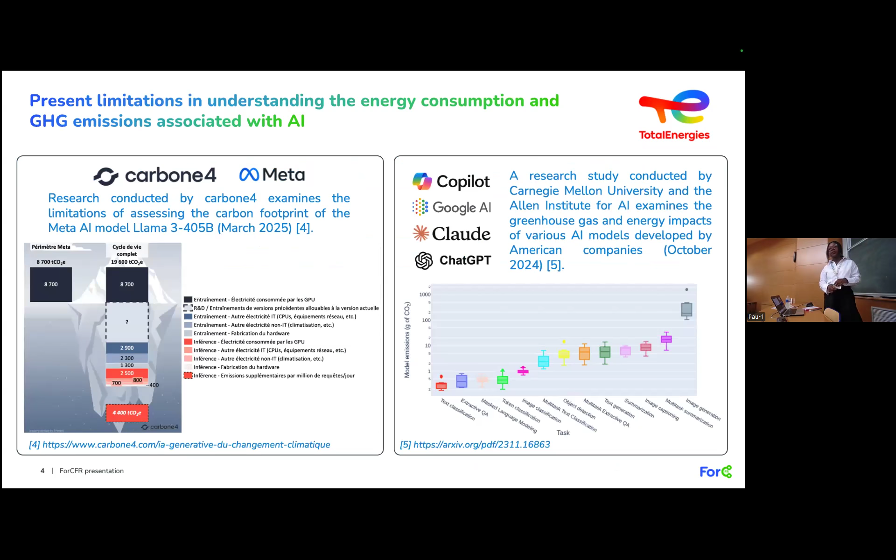There had been other studies trying to understand the energy consumption and CO2 emissions of using AI. There was a study done by carbone4 and Meta, trying to assess the limitations of estimating CO2 emissions. They concluded that the tip of the iceberg, shown in the image on the left side, is responsible for the consumption of electricity by the GPU. The GPU is the unit responsible for processing graphics for ChatGPT, for example.

What's below the tip of the iceberg is what we cannot see. All the emissions we are able to estimate are only the tip of the iceberg. All the other emissions, more than half of the iceberg, we are not able to accurately estimate. These emissions are mostly from training of data—we know that with AI we need to train data so it can recognize images, etc.—and we also have emissions responsible for manufacturing. So all of these emissions, we are not actually able to estimate properly.

Let's think about when we ask ChatGPT to summarize a text, for example. The emissions that they show us are probably only less than half of what we're actually needing. So let's start from here.

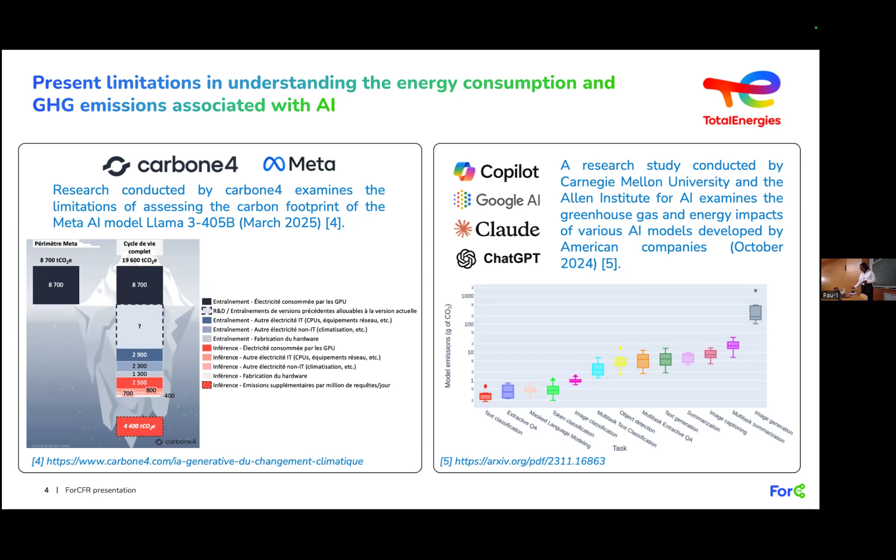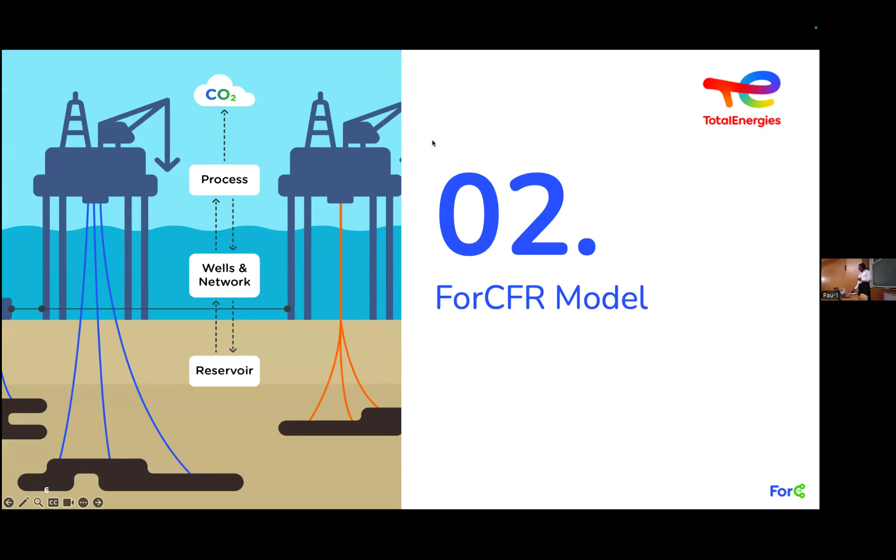As for the ForCFR model, before we actually construct it, we need to analyze a production field. We need power to be able to produce, but to produce this power, we need to burn fuel gas, and by burning fuel gas we'll have CO2 emissions. What we've seen based on experience is that most of the power requirement in a field comes from reservoir management and export.

Reservoir management involves water injection, so we use a lot of water injection pumps. For gas compression, we use a lot of compressors to compress the gas, and also for export. So before we think about tackling CO2 emissions, we need to look at where we have the most emissions and start from there. Then we look at all the other parts, but this is the main part, so we usually attack from here. This is what we can do with ForCFR.

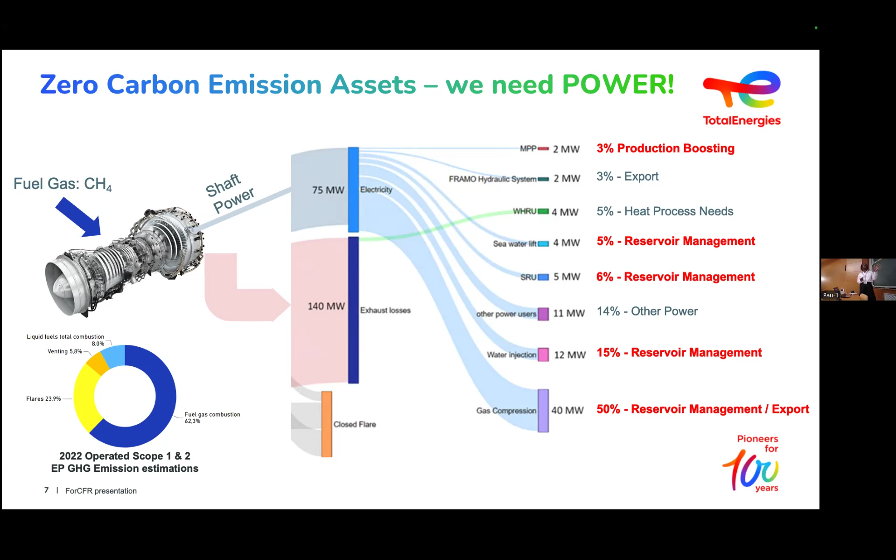ForCFR is a solution for the industry because before, some engineers, reservoir engineers, well performers, were evaluating production profiles and optimizing separately. They wouldn't communicate, they would do whatever they had to do, but separately. Then they would take these production profiles and input them into a CO2 file, which at the time was an Excel file, and try to calculate the CO2 emissions associated with their production profiles.

Then they had to test different scenarios. Let's say they were trying to close a compressor to reduce emissions, but this would take half a day. That's a lot of time. And if you have 20 scenarios, you'd take two weeks to analyze them. In oil and gas, time is money.

Then ForCFR came as a solution because now you have integrated CO2 emissions within ForCFR. You don't need to look only at production profiles and then go check CO2 emissions separately, you have both with ForCFR. You use your production profiles as input, and ForCFR gives you your CO2 emissions within seconds. Then you can choose to optimize your production with ForCFR, and you get your CO2 emissions straight away in the results.

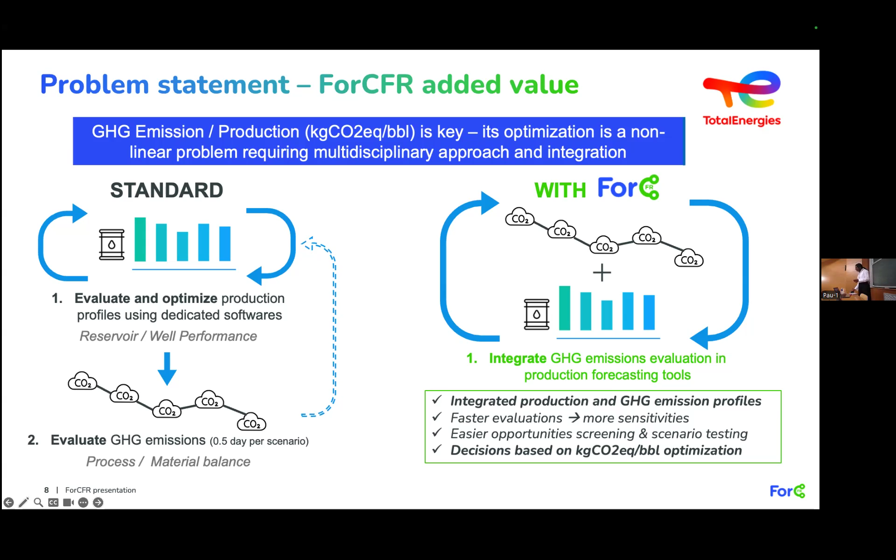This helps all engineers make decisions based on intensity optimization. Now you don't have to look only at CO2 or only at production, but at both. So this is actually a gain.

Okay, where are you from? Nigeria. Brazil, okay, very good. And online, if there's anyone from one of these countries, please, can you show an emoji? Thank you.

So now I show you the ForCFR interface. This is what it actually looks like. As you can see, we have - I'll just activate the pointer for the people online. So as you can see here, we have the schematics, and here I would say a mimic of the production inlet of a production facility.

So we have as inputs the production profiles and the equipment performance curves. The equipment performance curves will be used within this equipment here, so we are able to calculate the power demand. Once we have the equations integrated into the model, we run the model, and the model runs behind it with a Python script. Once the model runs, we have as outputs the GHG emissions profiles, and this is actually our final results.

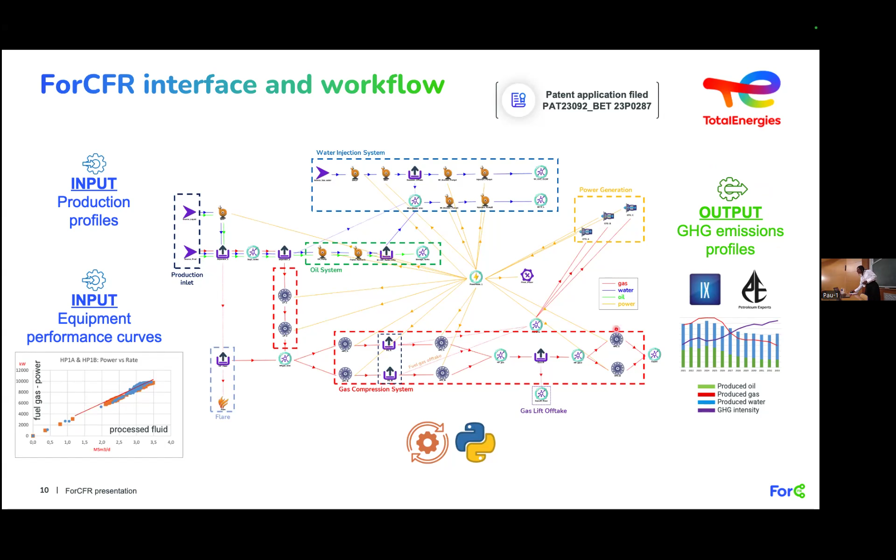Then we move to how we construct a ForCFR model. The first step to constructing a ForCFR model is the data collection. This is a very important step because this will ensure the quality of your model - the quality of the data you have will ensure the quality of your model.

So here we usually need the description of the process. It can be a PFD, a process flow diagram. We need the equipment performance curves. For greenfield, we don't have these performance curves - we will have rather the theoretical curves. But for a brownfield, we will have the historical performance curves. And then we will need your production forecasting tool, which is usually a Gap model or an Intersect model.

So we can couple your production and have the integrated emissions profile. A file that we usually use that is very important is the process quick look assessment, because it provides us the assumptions of the equipment, the availability of some equipment, and the way we need to operate some of the equipment. So all this information is actually very important.

Now to the ForCFR modeling, as I mentioned, we need surface process. So we try to mimic the process, but simplifying even more. We try to model all the consumers that are important for the CO2 emissions, the ones that consume the most power in the field. Then we try to balance the model by matching the material, power, and heat balances. This will also ensure the continuity of your model.

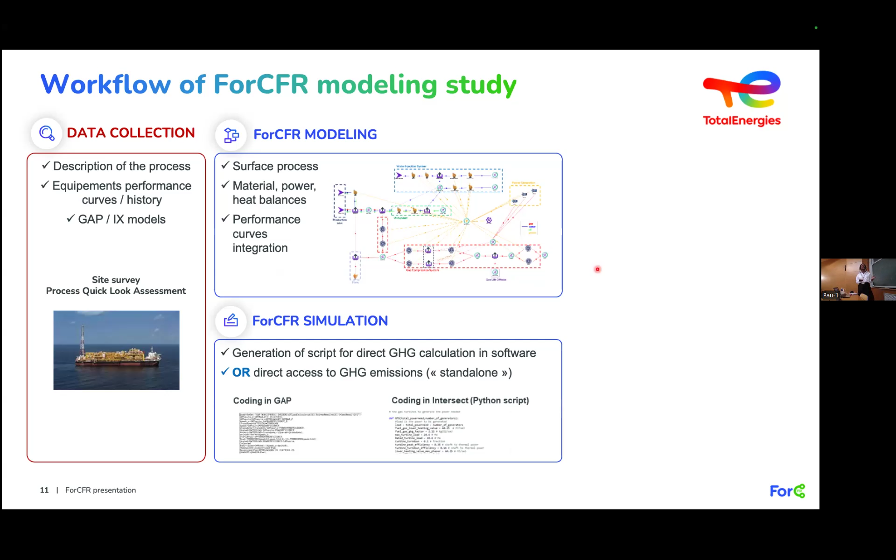So Intersect or Gap. In this case, you will have your script generated and automatically linked to your reservoir model. And all you have to do from this point onwards is what you do as a reservoir engineer - you just run the simulation and that's it. You have your production profiles and your CO2 emission profile.

So if you look at this plot right here, you see that you have your production profiles with your GHG intensity. So as easy as it is, you have your CO2 emissions with your production profiles. You will be able to see long-term, short-term, whether you have any opportunity to reduce the CO2 emissions.

ForCFR can be used for a lot of cases. I'll start with the long-term plan, which is the case we use the most. In the long-term plan, we usually assess a lot of CFR projects. CFR stands for carbon footprint reduction project. Here we are able to assess the impact of these projects on a long-term basis.

Let's say you have a compressor rebundling coming in 2030. You can actually put that in ForCFR. You can instruct the model to do the rebundling, and then you'll see the impact on your CO2 emissions over time.

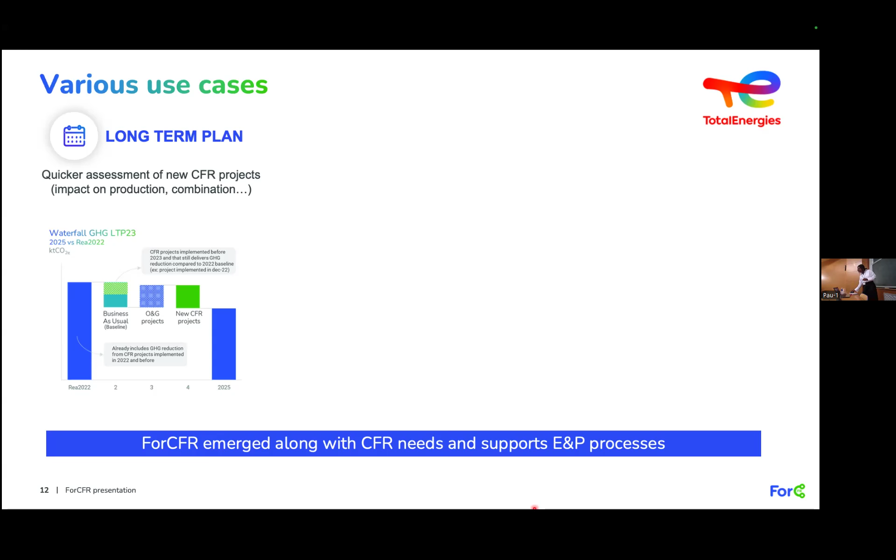Then you can use the ForCFR model also for asset optimization and planification. We have some asset optimization ranging from short-term to long-term. In the short term, as I just mentioned, compressor rebundling, you can assess whether this is a good initiative for your field management or not.

On the long term, you can have gas lift optimization. You can see how it will behave throughout the years and whether you will be able to reduce the CO2 emissions throughout the years. Then another case for the ForCFR is development studies.

Development studies are usually for greenfields. We can use ForCFR to evaluate different scenarios, whether you want to drill an infill well, whether you want to add a recovery mechanism. We have done a lot of studies with EOR, and we were able to assess whether the EOR technique was actually giving us less emissions or not.

You can also assess well pattern, whether a certain well pattern will give you more emissions or not. Then you can probably choose among different well patterns that will optimize your CO2 emissions.

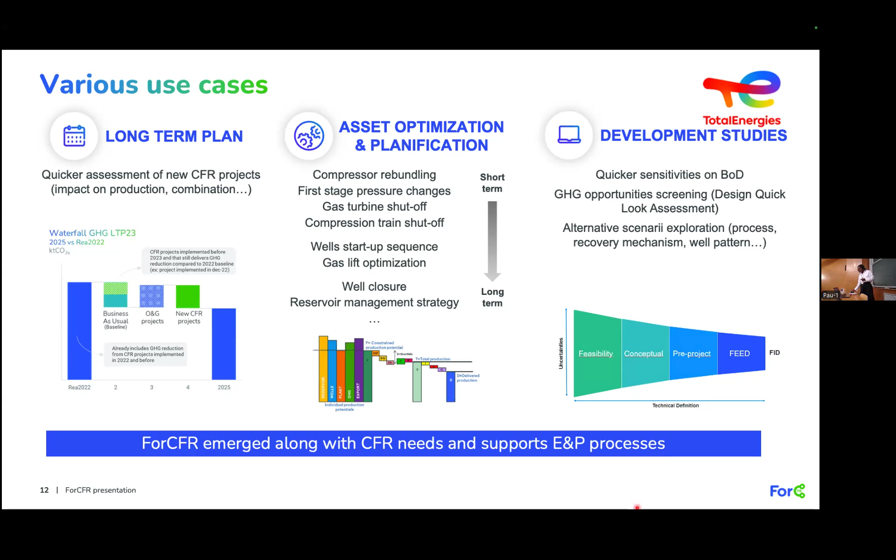Then we move to the use cases for ForCFR. We have done work on a brownfield, which is Angola Block 17. In this case here, it was the FPSO 12. So we tried to analyze different water injection scenarios.

We listed 4 water injection scenarios. Initially, we analyzed that the water injection accounts for 35% of the total power need, which is a lot. Remember, as I said in the beginning, we need to first look at the equipment that consumes the most power, and then we need to start from there if you want to reduce the CO2 emissions. So this one accounts for 35% of the total power need.

So we are going to try to reduce the CO2 emissions from here. We've listed 4 cases - 3 cases apart from the base case. The first one was to reduce the water injection by 30%. The second case was to inject water at full capacity. And the third case was to inject water intermittently, 1 month on and 1 month off.

This is where it gets interesting. Question: in the reduced water injection case, where we reduce the water injection by 30% compared to the base case, what is the long-term impact? Answer 1, production increases and the intensity increases. Second, production decreases and the intensity increases. Third, production increases and intensity decreases. Fourth and last, production decreases and intensity decreases. I will give you 30 seconds to 1 minute to think around it, and we'll see what are the answers.

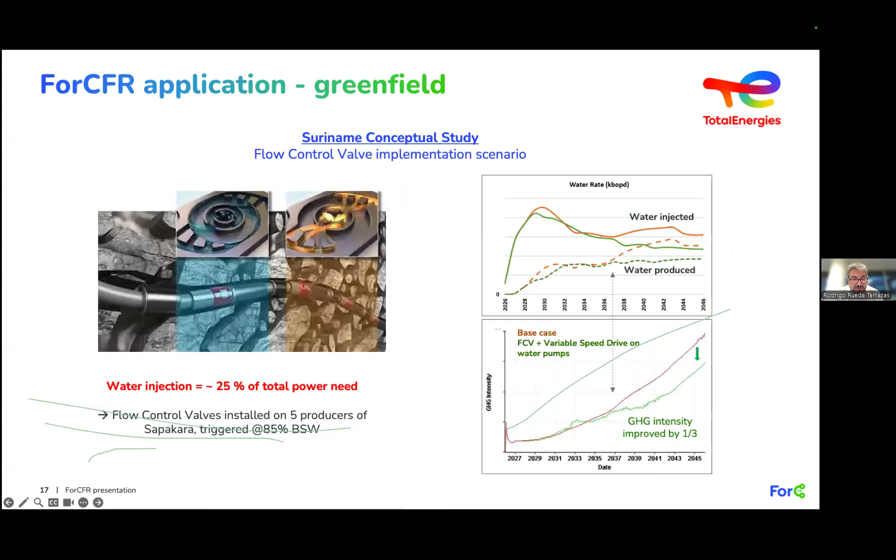I don't know if you want to go back to slide 11, or was it? I think it's referring to the chart in the bottom right that shows production decreasing with time as expected. But the question is, why is the GHG intensity, the purple curve, increasing? I myself might feel tempted to answer, but I'll let you, Anna, comment.

Yes, sure. Thank you, Rodrigo. So we're talking about long-term, with respect to GHG intensity, which is CO2 emissions per barrel. As production is reducing, we still have emissions, so that's why the curve is still increasing over time. The CO2 emissions are the upper numerator, increasing, and the lower denominator is production, which is decreasing over time. So we still have emissions, and that's why the curve keeps increasing. I don't know if I've answered the question.

Yeah, thank you, and I think it's quite clear. At first sight it might seem counter-logical, but then thinking about it, it makes a lot of sense. Tomas, if you have a follow-up question, please feel free to add it on our LinkedIn chat, or for those watching on YouTube or here through Zoom. Meanwhile, I have a question for myself.

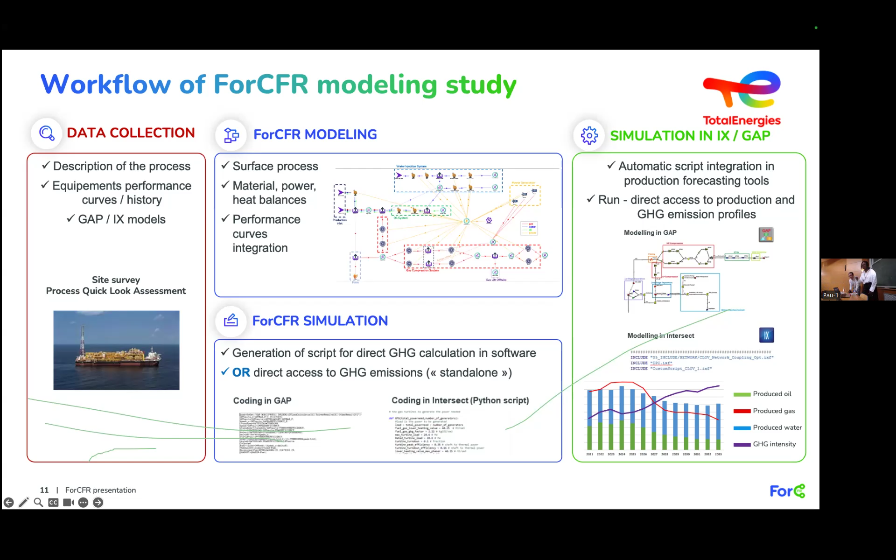Exactly. So we did a project on EOR, and I cannot give too many details because it's quite confidential, but it's actually a project being presented at ADIPEC. We saw that we had net negative emissions because we were injecting some gas, and we saw that the gas we were injecting was being stored in the reservoir. We were producing the oil, and we also had an aquifer, so the gas we were injecting was filling the spaces from where we were producing. We saw that because of the storage, we were recycling even less gas, and this is what caused us to have negative emissions at the end.

Why don't you communicate about this? It's so interesting to communicate about. Yes, that's true, because your reductions are quite small. Yes, 9%.

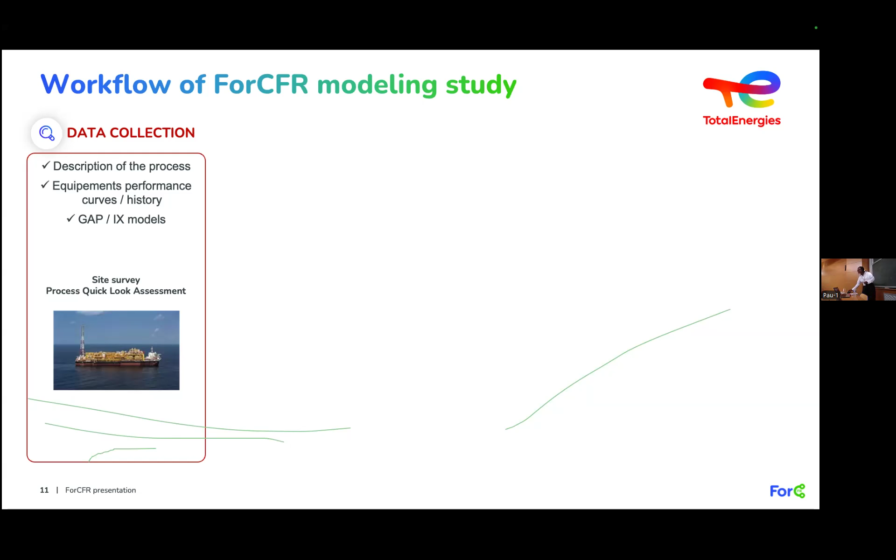Small reduction compared to the work you achieve. So 9% was actually because of field operations. They were not very welcoming of some of the opportunities because that would compromise a little bit of their production. That's why we were only able to achieve 9%. But if they were willing to sacrifice just a little bit of the production, I believe we would have more. But it's understandable.

Thank you. Do we have any more questions here? Yes, and just to add, sorry, go ahead. No, Rodrigo, I don't think we have questions here. We have a question online from LinkedIn from Samuel Ojidi.

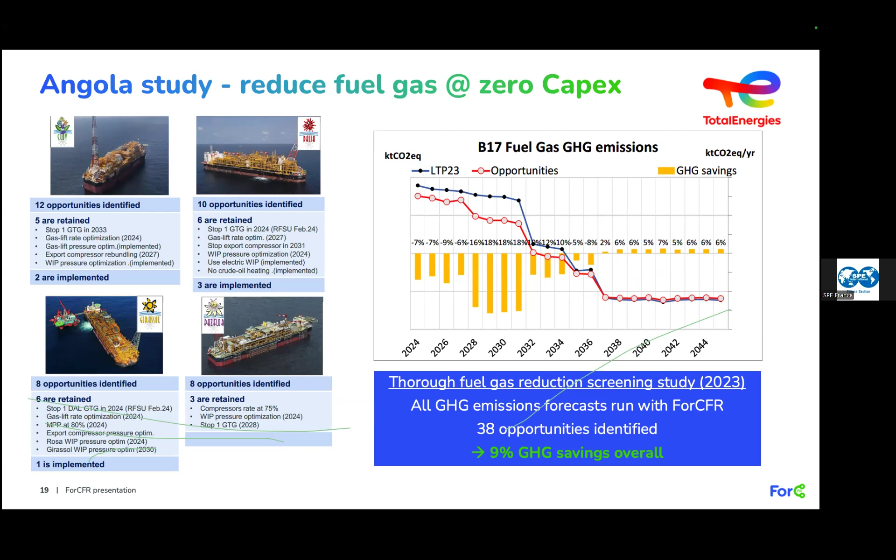Yes, okay, thank you, everyone, joining online. Thanks, everybody, wishing you to have a great after work in Pau. We feel a bit sorry that we are not able to join you, but thanks a lot for the amazing presentation, it was really eye-opener. Thanks, everybody, and take care. Thanks, everyone, bye-bye, bye.